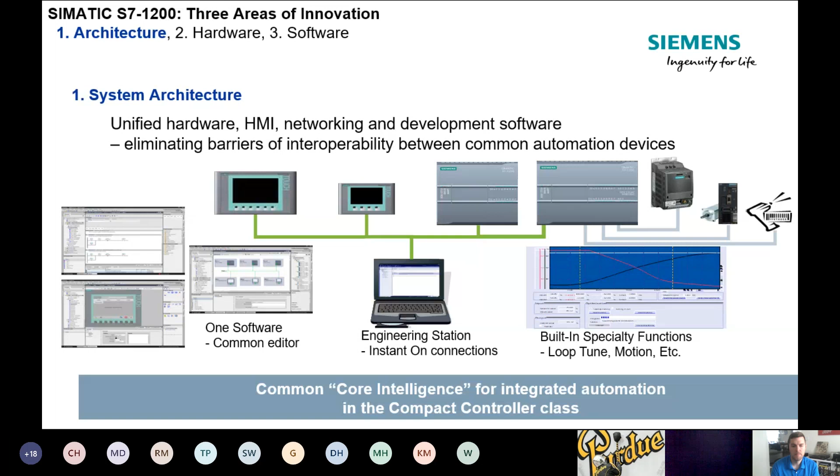This is a little overview of the hardware. So you have the integrated Ethernet on single port on the lower PLCs. Starting with the 1215 and up, there is a dual port, same one NIC, but there's a dual port Profinet card. We have 3 specialty modules to the left. Those are going to be your communication cards. We can go up to 8 signal modules on the right of the PLC.

The 1211, which is our starter PLC, it is non-expandable, but it does have built-in I/O. So these are really low-cost 1211 PLCs. They still have Profinet. They can still be networked, but they don't have any expanding I/O. That does limit the applications, but it does cut down on the cost. You are able to use the inputs and outputs on those and then still network those to a larger PLC.

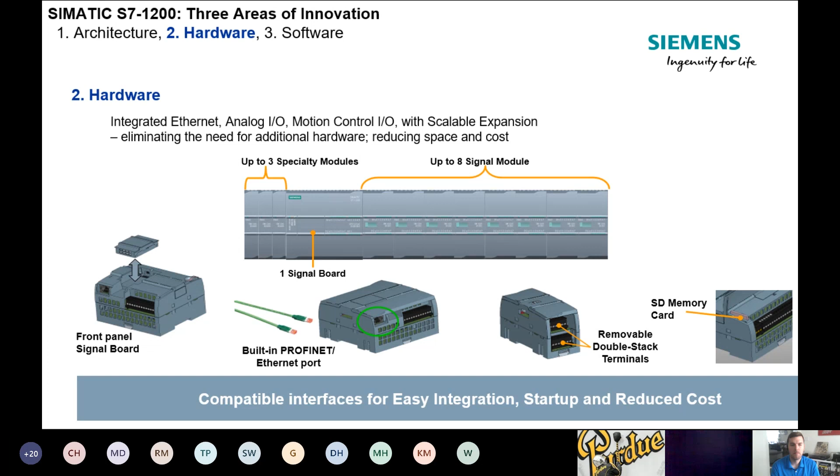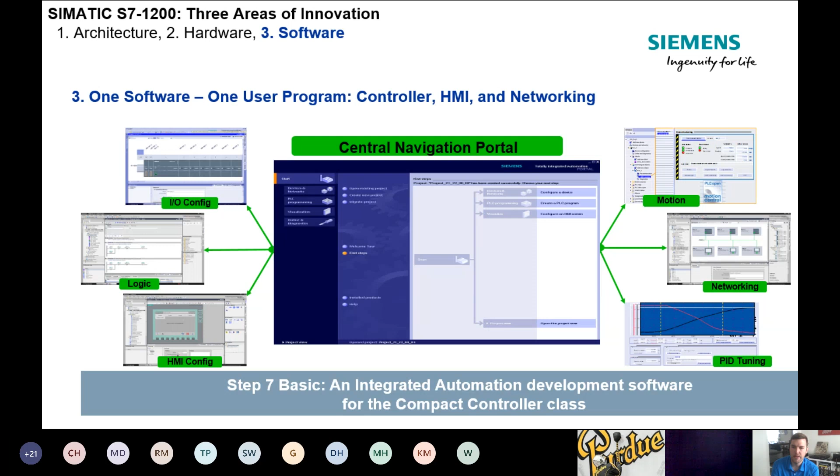Step 7 Basic. Step 7 Basic is our starting software for TIA Portal. This allows you to program the WinCC basic panels as well as the S7 1200. So if you buy a copy of the Step 7 Basic and you have a 1200 and a basic panel, you can program a number of those.

You can still use remote IO. You can still use a Siemens drive, like a G120. Those are still add-on networking devices. They can still be programmed with Step 7 Basic. Basic just limits you to the 1200 PLC and a basic panel, but you can add on licenses for other products.

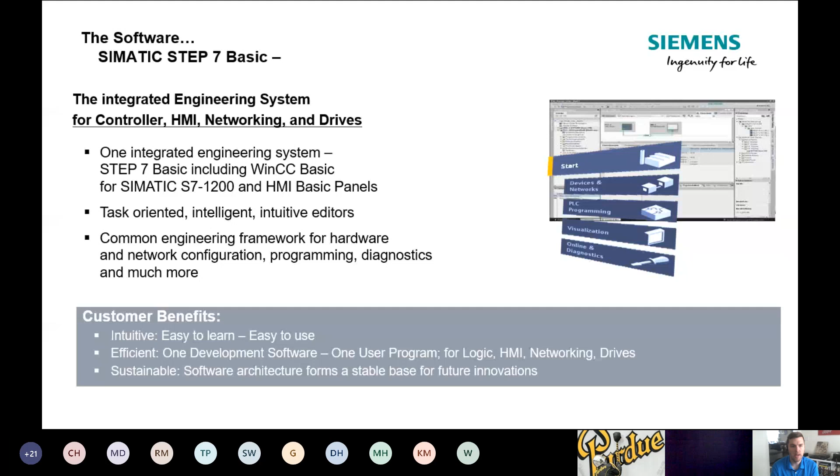So here's a scale of the controller setups that we currently have. We have definitely added a lot more, so this may be slightly out of date, but overall it gives you a basic concept. So the 1200 being a basic controller: standalone systems, wastewater treatment, car wash, elevator pump control, material handling, packaging. You'll probably have seen it in some of your plants or some of the sites that you have visited, but the popular AGVs that are pulling your parts around the plant, there are a few companies that actually will put an S7-1200 in those AGVs that is handling all that automation to drive around the plant to pick up and drop off products.

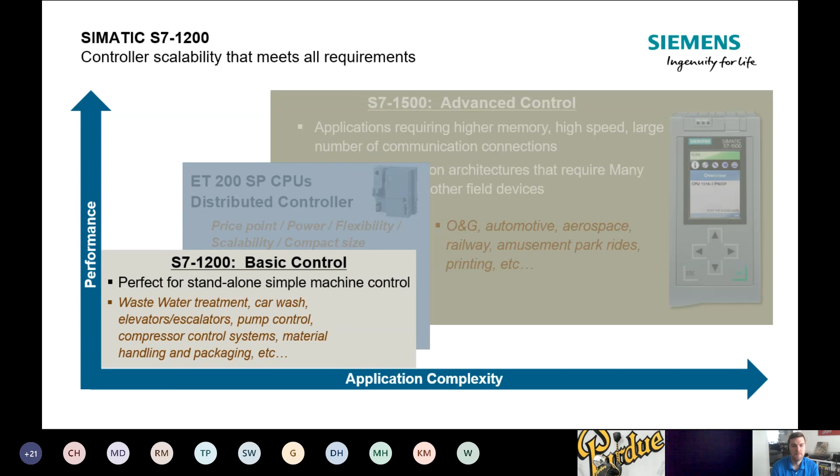All right, some innovations of the 1200. So you have technology integrated. Actually, we are going to show that today in our slides or in the actual example. Security integrated. There's plenty of protections: write protection, security, passwords, safety. All that is built into the 1200. Engineering in the TIA Portal. Integrated system diagnosis.

There is actually system diagnostics that is built into the 1200 that you do not have to program. It actually comes built into the firmware of the PLC, and it will provide diagnostics without having to add additional code. And that's actually built into both the 1200 and the 1500. And then design and handling.

All right. This is just kind of a breakdown of some of the options that we have for the 1200. So you will see on the left side, we have a switch module, the CSM. That's just a four-port unmanaged switch that is in the 1200 kind of body. So if you need to put a switch out in the panel, you can have it in the same form factor as the 1200. We have a power module. So that power module is the power supply for the 1200 for your DC setup. Communication modules. So we have multiple CPs: Profibus, AS-i, your CP1243, which is your second IP card, as well as your RS232/485 cards.

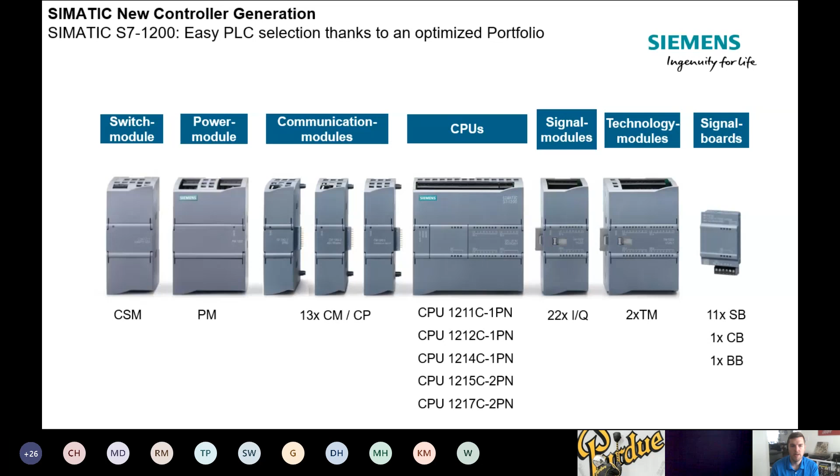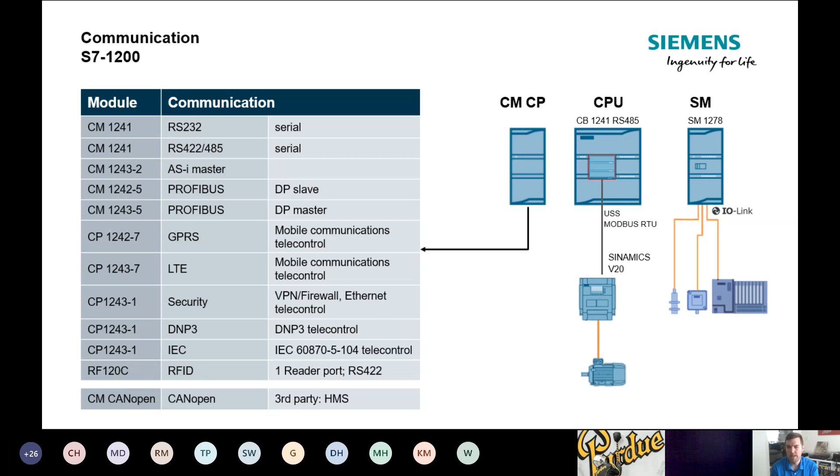So here's a breakdown of the communication modules: 232, 422, 485, AS-i Master, Profibus, multiple setups for our PLC. We do have an RFID communication card. So if you are reading RFID, the RF120C, we can do RFID in there, as well as the IO-Link on the right.

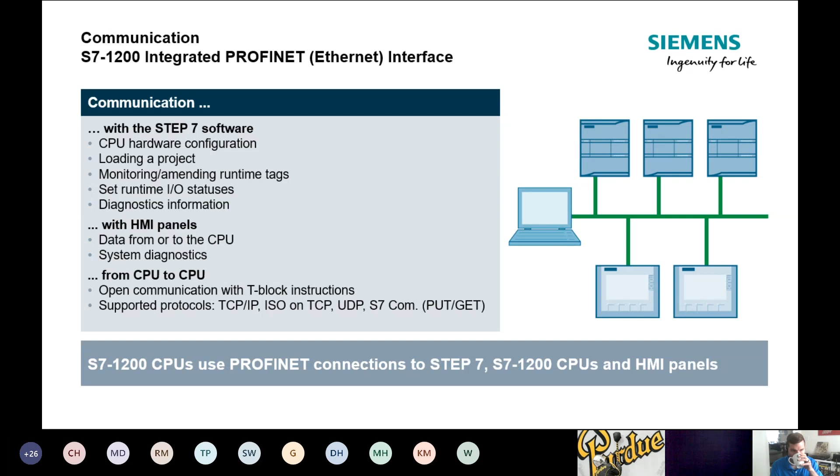Communication, so CPU hardware config, loading a project, monitoring runtime tags. This kind of breaks down the setup for our Profinet. The integrated web server, we'll cover this a little more later, but the PLC actually has an option in the configuration where you can activate a web server, and that will allow you to do online diagnostics, as well as monitoring tags, reading and writing different tags from the web server, all without having the software or an additional laptop. That can just be done on a simple web browser.

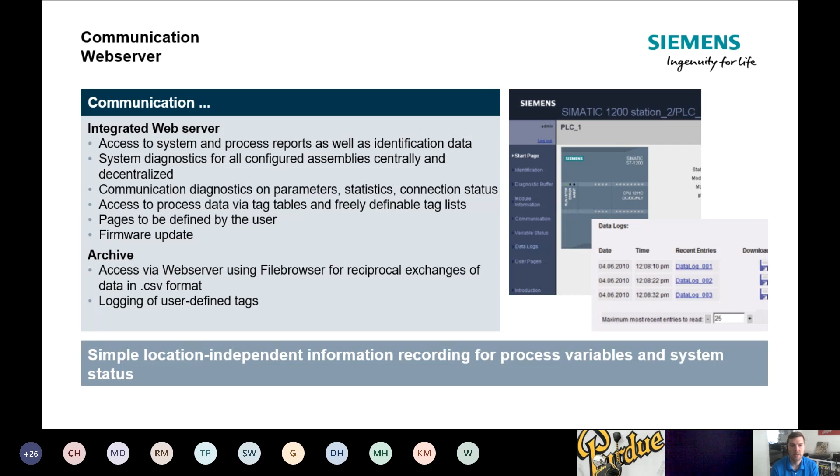And we also have an archive. There are add-on blocks that are free from Siemens that allow you to use a data logger, where you can log data and save it to a CSV file on the SD card of the PLC, and then you are able to actually get in through the web server and download those CSV files for your data logging.

All right, SIMATIC memory card options. What can be saved: program data, system data, recipes, files, projects. You can store a lot. The sizes are on the left side. Typically, a 4 to 12 meg is pretty standard. If you are going to store larger files for your data logging, you may want to go to a larger memory card.

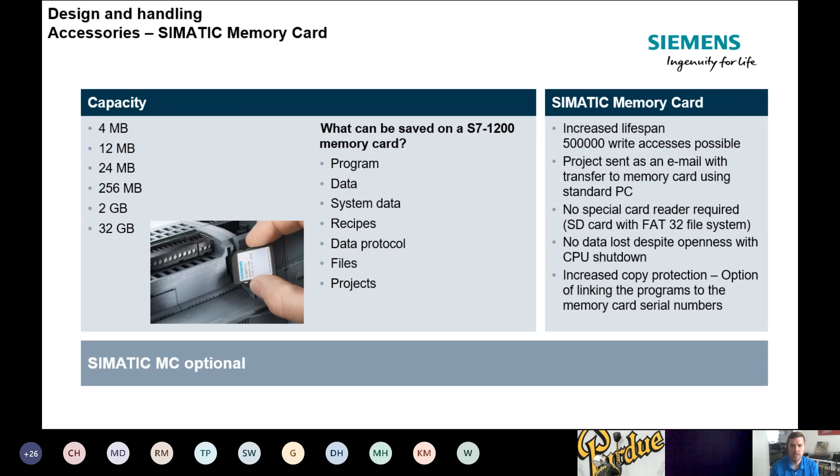And these are not traditional SD cards. These are a SIMATIC memory card. They do have additional firmware that's written on those. They are a higher quality SD card, so 500,000 write accesses possible. And these are covered with a pretty long warranty from Siemens if you do have a card that does fail.

Configuration control or option handling. This is a really neat setup where you can actually, through your OB100 startup, if you are an OEM and you are designing a machine, add in specific I/O cards to the configuration, and then depending on what is getting sent out to the customer, you can configure what is going to be loaded in.

So if a customer does want to add an I/O card, that is something that you can manipulate through the project. That just prevents any type of add-on additional cards being loaded into your machine that may not be set up the way that you want that machine to be configured.

The SIMATIC memory cards, I did get the note. The SIMATIC memory cards are the same for the 1200 and the 1500. Those are both the newer. They will be black in color. The 300 series are the teal colors, and those are not the same. The SIMATIC HMI memory cards are also different, if you're going to put an SD card into an HMI.

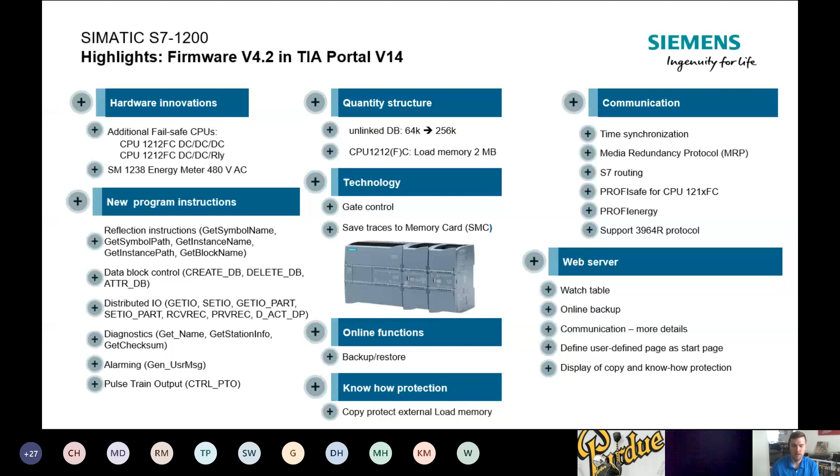So this is showing you some of the features with our web server, and this is showing you for the 1500. But there are capabilities where you can do traces from the 1200, and you can view the traces. I know with the 1500, you do get more flexibility and more configuration options, but this is showing you that you can store traces in the PLC and monitor them on the web server.

Backup and restore. So you can back up a project, recipe data. There's a full walkthrough on that, so if you need it, we can give that to you.

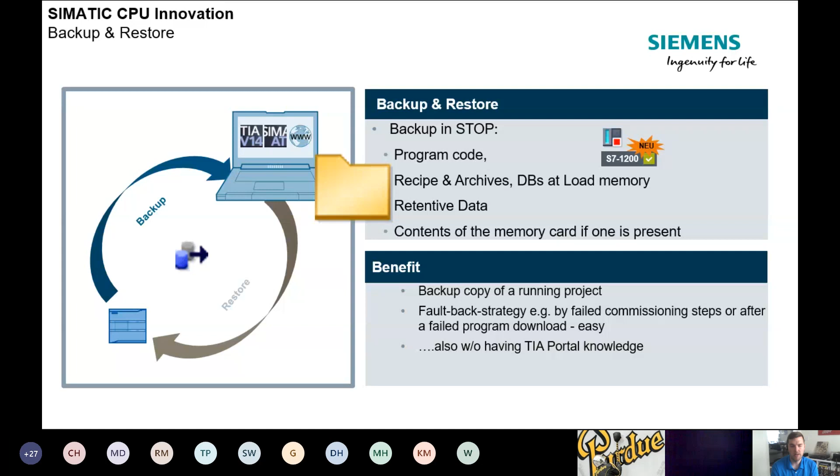Yes. Reduction of functionality of the user-defined web pages. That I am not sure. I will have to research if you're going to have any limitations on the web pages between a 1200 and a 1500. I would say no, because it's a simple web server, but I will have to verify that. That's a good question.

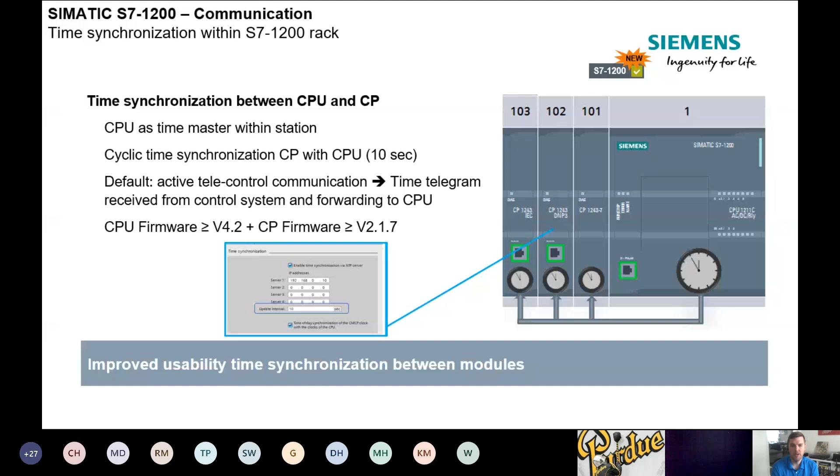Time synchronization between the CPU and the communication cards. So we do have built-in functionality for the NTP servers.

Media redundancy protocol. So this is a ring topology. A lot of us are tasked to manage a machine that has no downtime or limited downtime. You are able to use a 1500 or 1200 as a client on a ring. You've probably seen a lot more rings between switches. This is going to be more of a device level ring, but you do have that functionality for the 1200 to be a client.

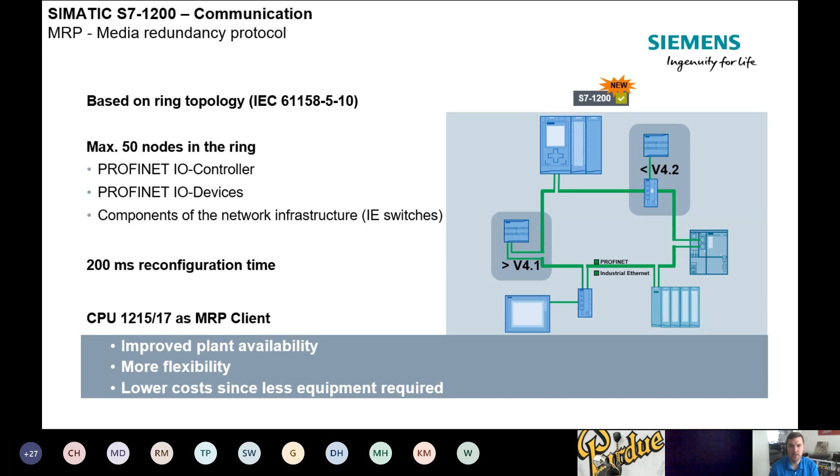You will still need a ring master, so that could be a managed switch, or a 1500 does have the ability to be an MRP master that can do the switching. I would still recommend having a good SCALANCE switch. We do have those available, and those are stocked in Ohio, as well as Siemens does stock all of their SCALANCE switches. And we have done a couple demos on that, but we're more than happy to show you some more to prevent that unnecessary downtime.

S7 routing. So if you've not seen this before, we have a PLC, a drive and an HMI all on a single subnet. And by adding a CP1243 card to the left, we are actually able to add a second IP address that is in the same IP range as an engineering laptop. The engineering laptop needs to make changes to an HMI, so I can tunnel in through the CP card, which allows me to transfer the HMI project, even though I'm not on the same subnet. So you are able to make those changes through that CP card.

And a lot of you have probably done that before. A lot of you are probably doing that now with either 1543s, 1243s, or our typical 343 card for our 300s. You'll add those to your rack, and that's where IT usually pulls their data for data analysis or different monitoring systems. But you are able to actually push back down and make changes on a system as well.

So some protection. I know we talked about security, so you can disable copying from the internal load memory to an external SD card. The 1200s have an internal memory, so you are not required to have an SD card. You can add an SD card and let the project run from the SD card, but there is an internal memory for the 1200. The 1500s and the 300s do need the SD cards to run. Those memory cards have to be in there. That's where the project is stored and run from. But the 1200 does have internal memory that you can just download right to, so that keeps you from having to add a memory card. But you have protections on there, so nobody can try to pull that project off.

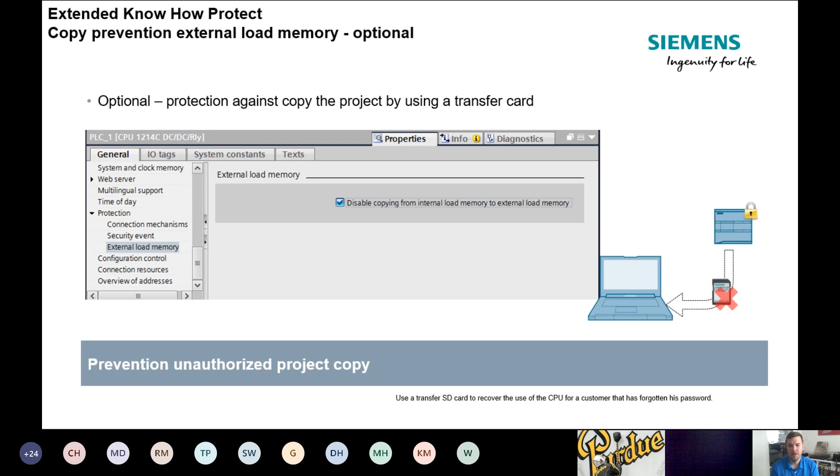You also have the ability to set up a SIMATIC memory card as what we call a transfer card. If you need to load a new project into a PLC and you're not physically there, you can put your project on a SIMATIC memory card that is set up as a transfer card. Your customer can power down their system, put the card in the PLC, turn it on, let it load, turn it off, and the project will automatically copy from the SD card and load into the internal memory of the PLC. That way your customer doesn't really have to do any changes. It's a simple maintenance task to transfer a new project into a PLC. It keeps the project safe from any unfortunate changes in the code.

The SIMATIC Automation Tool. This is a really cool tool that we have here that allows you to program updates. I can do firmware updates. I can set IP addresses. I can scan the network. This was free. I think Siemens has now started to charge for this, but you're looking at maybe $200. Very, very low cost for what this will allow you to do.

You can download to PLCs. You cannot do any programming, but if you have a PLC that is running and connected, you can take your project and download to the PLC. It will take the download and it will run, and it's all done from this add-on software. You don't actually have to have a full-blown copy of TIA Portal. You could sell this to your customer and let them have it on an engineering laptop. All you would have to do is send them a copy of a project. They would open it, select the PLC that they want to download to, and push that down.

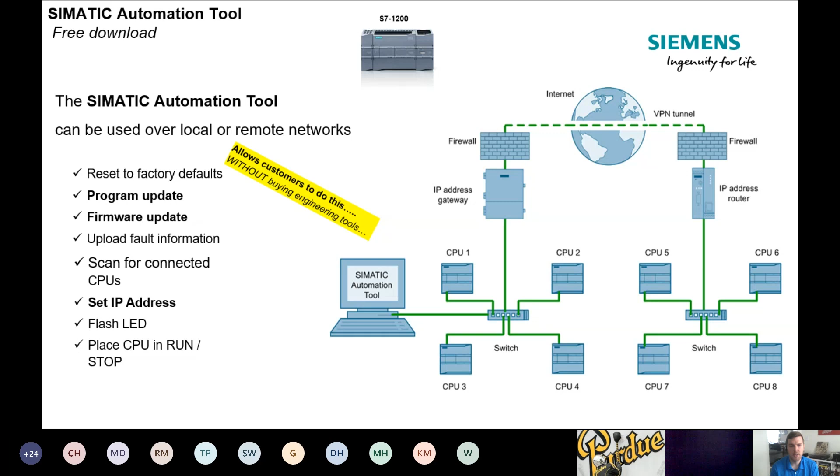I did get a question about internal memory for the CPU. I will have to double check that. It is listed in the S7-1200 manual. I do not know off the top of my head what the internal memory limits are for the 1200. They may vary by PLC, but I'll dig that up in the manual for you.

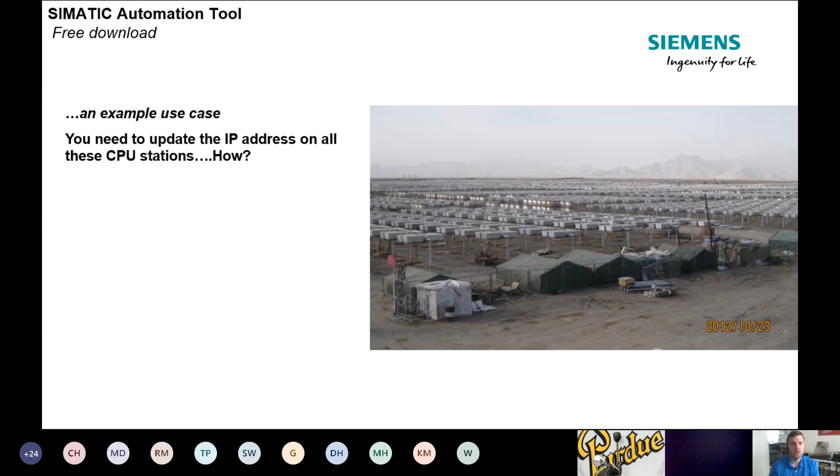All right, so you had to go around and change the IP address on all of these CPU stations.

Obviously, nobody wants to go through that and do it one at a time, or make the user go out there with a project. You can use the automation tool to update them all at once. I don't know why you'd want to do that, but in case you do, we have that capability.

Like I said, they do offer a free version. It is limited. There's a paid version. Like I said, I'm going to say about $200, and that does have the full functionality that you can use to modify and configure PLCs without actually having to program.

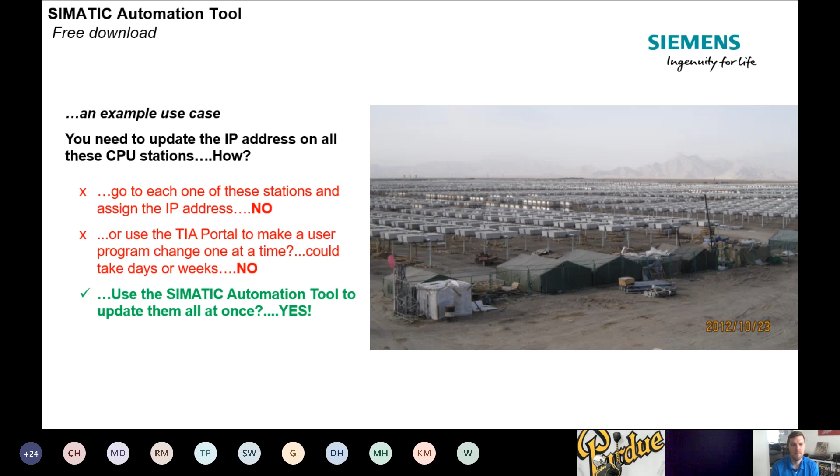All right. So general mechanical engineering, special machines, apparatus engineering, packaging, production, AGVs, drilling, cutting, grinding. It's kind of just an overview of the basic 1200 controller. This will definitely give you a good idea of where this is going to go.

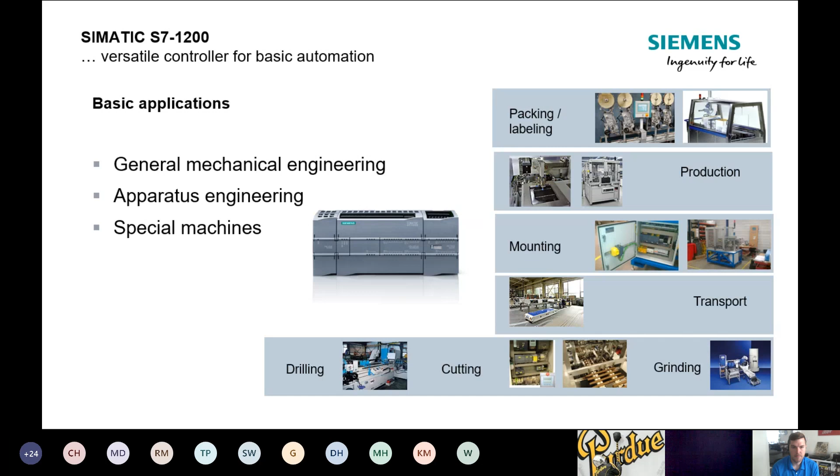All right, starter kits. So these part numbers are definitely going to be an older version, but please get with your salesman and ask them for the newest list, or if you have a specific one that you're looking for. These starter kits are great. Now they are for starter kit testing only. These are not to buy and put into your machines. They are monitored for how many we're selling, but these are really, really low cost starter kits.

The top one's just the 1200 with Step 7 Basic. You also get an install disk and a license. You also have a printed circuit board with some toggle switches so you can test some code. From there, we also offer it with a 400 and a 700 basic panel. Once again, Step 7 Basic will program both the PLC and the basic panel.

So you can get a 4-inch or a 7-inch HMI. I'm going to say these are $900 for the largest one, down to about $500. These are really, really inexpensive. I think the license for Portal itself is roughly $500. So you're getting a license and then getting PLCs and HMIs for practically free. This is our standard setup.

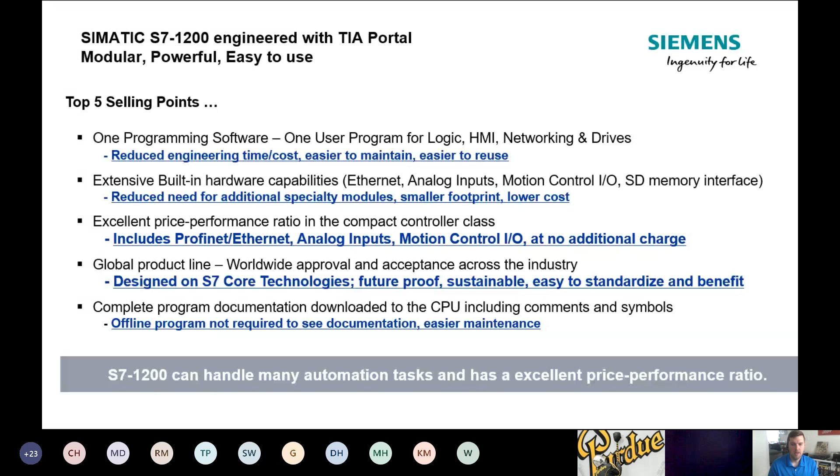Top 5 selling points: programming software, built-in hardware capabilities, price performance, global product. Pretty much a walkthrough of why the S7 1200 can really do a lot of stuff, and we're going to get into that with some of the actual programming. And that is the presentation.

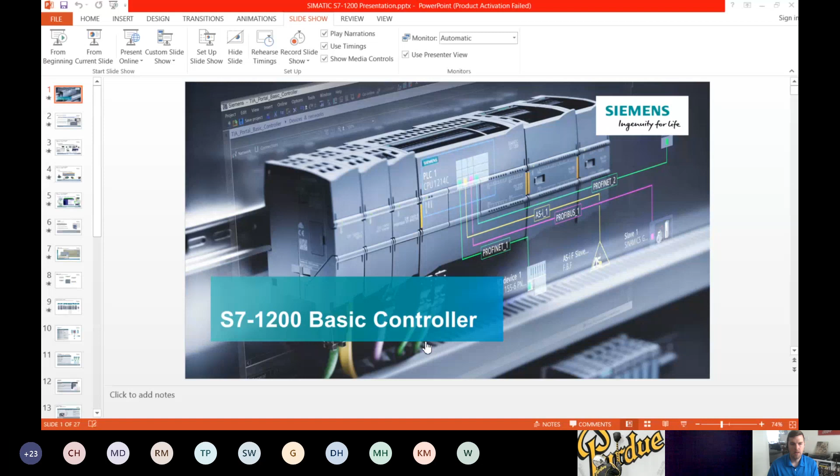All right. So I've answered most of these questions here. All right. So you are all muted. That is my presentation for the PowerPoint. I'm going to jump into TIA Portal, but I'm going to take a minute here and give you guys an option if you have other questions to chime in and ask away. Give it a minute or so, and then we can move on. So if you want to ask a question, unmute and ask away.

Yeah, this is Mark Dobrinsky from Novelis, Terre Haute, Indiana. Hey, Mark. How you doing?

Hey, what I'm interested in is the unit that you just showed earlier; it would be good for training. And I'm interested in the one with the safety, because then we can set it up and use it for whatever we want for training. Yes, so we will get you a quote on the 1200F starter kits. Yes. Thank you. No problem.

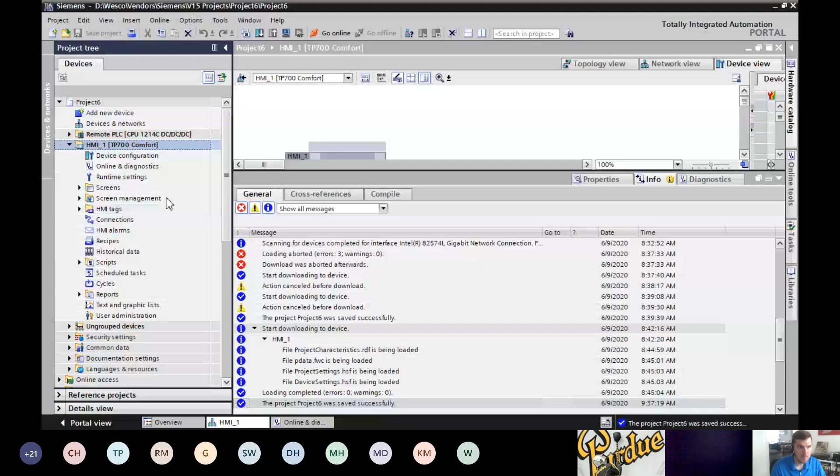All right, so I am going to start a new project real quick. As I'm presenting TIA Portal, if you have other questions, like I said, please chime in and we will answer those for you. All right, so if you have started TIA Portal, you've probably seen something like this. This is a typical setup that you'll have here. And once you've gone through that setup, you will go into our project view. So we're going to go ahead and start a project.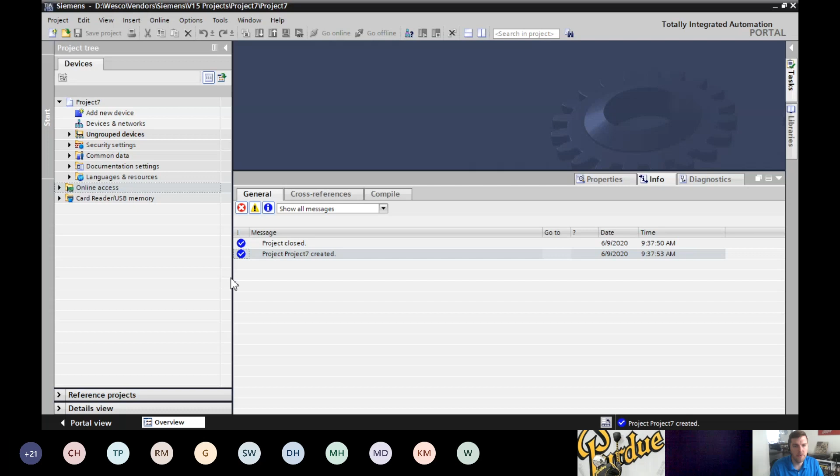So I'm going to add a device. And I'm looking for a 1200. And I'm going to show a feature here. So down at the bottom of your CPU setup, there's one called unspecified. So by selecting this, you'll see I kind of have like a ghost PLC.

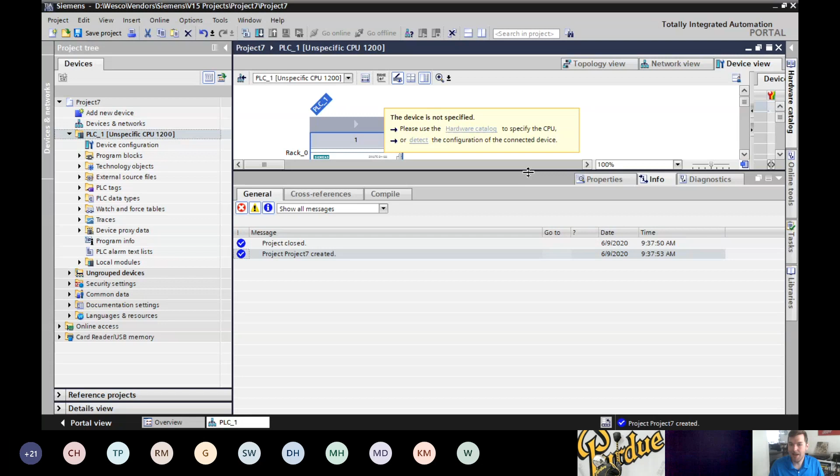What this allows you to do is if you are connecting to a machine and say your machine has a lot of I/O. Now in a 1200, we do have a limited I/O that can be expanded. But if this is a 1500 and you had a really long rack that you needed to pull in some hardware, you can configure everything from the catalog and pick module by module. Or I can actually do a detect.

What that's going to do is it's going to check my network to try to find the PLC that is currently out there. It found my PLC, and by being able to do a detection, I not only bring in my PLC and its configurations, but I automatically will bring in the I/O that is on the right side of it or that is connected to it. So if I had some communication cards, those would automatically get pulled in. If I have I/O on the PLC, that gets pulled in.

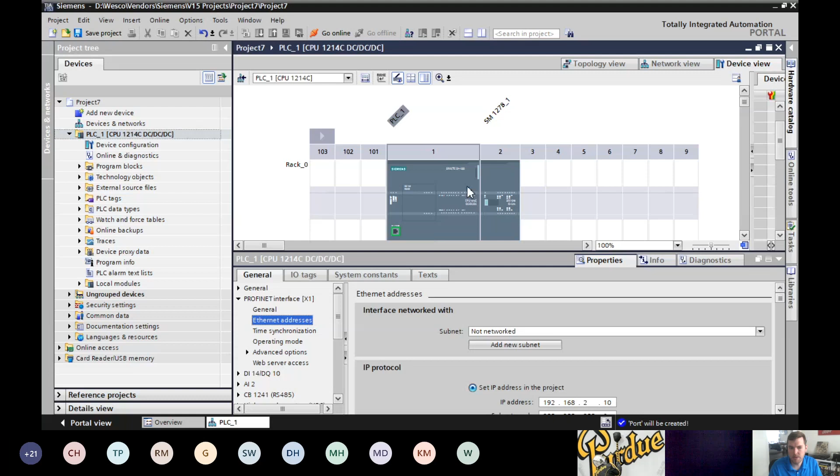In this case, I have a CB 1241 on here. This is pulled in, but that automatically will detect it. It will know the configuration that I have set up. Now this will automatically default it back to the IP address of the PLC that I have. But your configurations will still need to be set up. This isn't going to pull in all the configurations. It's just going to pull in what it sees, being this is a new project.

All right. So some of the nice features of TIA Portal in 1200, like we were saying, we have our cards to the right. So here's our hardware catalog. So those of you that are familiar with the SIMATIC Manager or S7-300, your hardware configuration was always in a separate page. You always had to open that up and kind of run through. All this is going to be done in the same window with TIA Portal. There is no second pop-up or another screen that you have to go to. It is done more with tabs, but it's all kind of built into the one window architecture.

So on the far side, I have all of my communication modules. So I have my 1243 cards, depending on what type I need. Profibus, point-to-point, identification, all that is going to be built on the right side. In this case, I'm actually using a communication board, which is just a simple RS485 single configuration here. Instead of having the card on the right side or on the left side, I have it just built into the PLC with the communication board here.

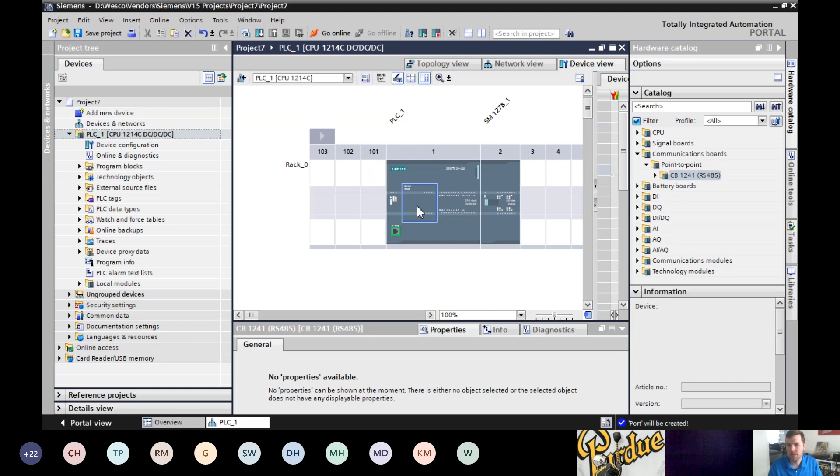On the right, I have an SM1278. This is actually our IO-Link module. So this is my IO-Link master. I actually have up to 4 channels for this IO-Link master that I can configure. So if you would right click and wanted to configure, you can start the device tool, and that will open up your port configuration tool where you can add on additional IO-Link modules. In this case, this is just using a distance sensor running on IO-Link.

If you have not seen it, Dave Henderson does an event that has done some with IO-Link for some of our controls products that are running on IO-Link, which is a really, really neat system that we have. We also have multiple IO-Link devices out there.

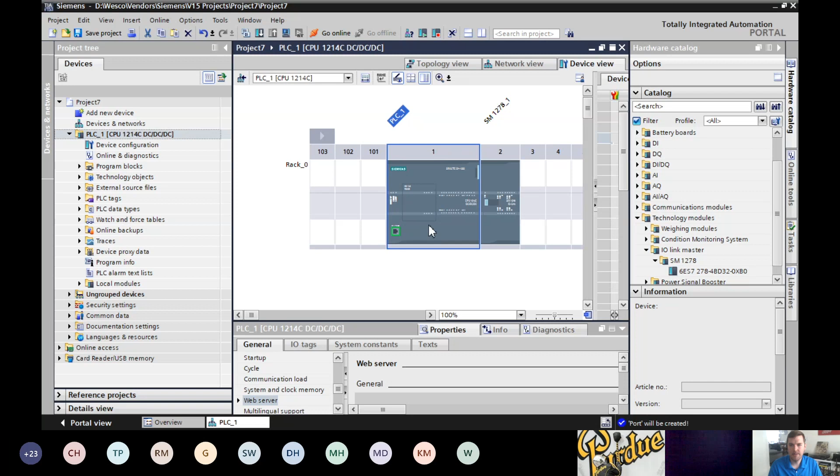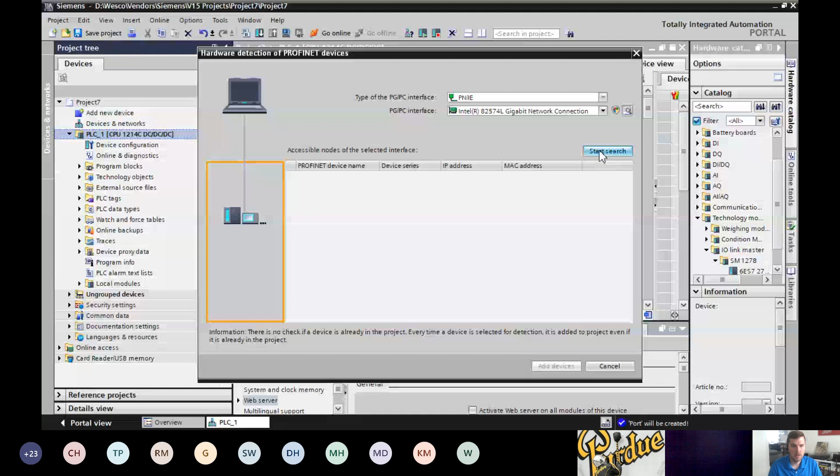All right, from here, I now have a PLC. If I wanted to add additional devices that are out there, this is just a single rack. If I wanted to pull in maybe an IO rack that is out there, I have the option to do hardware detection. And that's actually going to search my Profinet network. By clicking here, I can hit start search. I can find my remote IO rack.

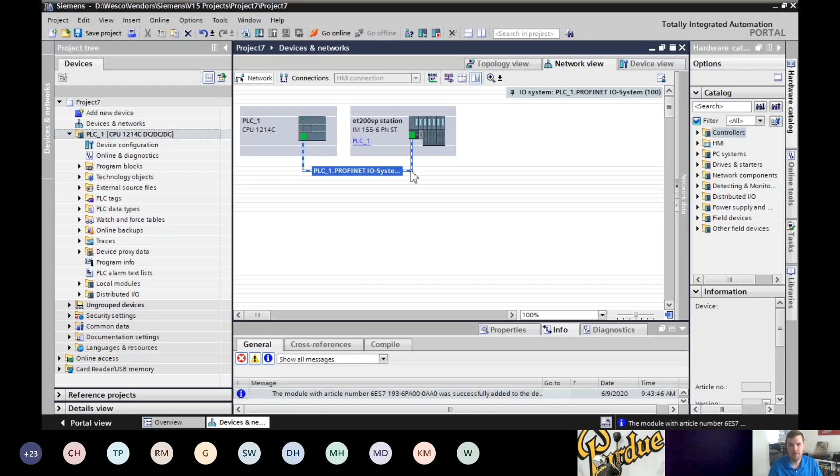And if I go into my network settings, you can now see I've pulled in that IO rack. I can select the PLC here, or I can use the drag and drop. And I've now made my Profinet connection. And this is my new Profinet network. By going into the device view, you will see it not only brought in the head module, but all of the corresponding IO cards, as well as the correct firmware.

This IO card may have multiple firmwares, and if you are adding this manually and you start going through by full part number, you may have a 1.0 or a 1.1, and you would need to actually select that in your hardware catalog as you go through. If you're picking the right one, you'll need to make sure that the IO version is what matches the card that you have. So with the hardware detection, I'm actually able to pull that in and add in that device.

Same thing from the PLC. If I wanted to, I can also try to do a detection for an HMI. I can do maintenance on here. All that can be pulled in from that additional setup.

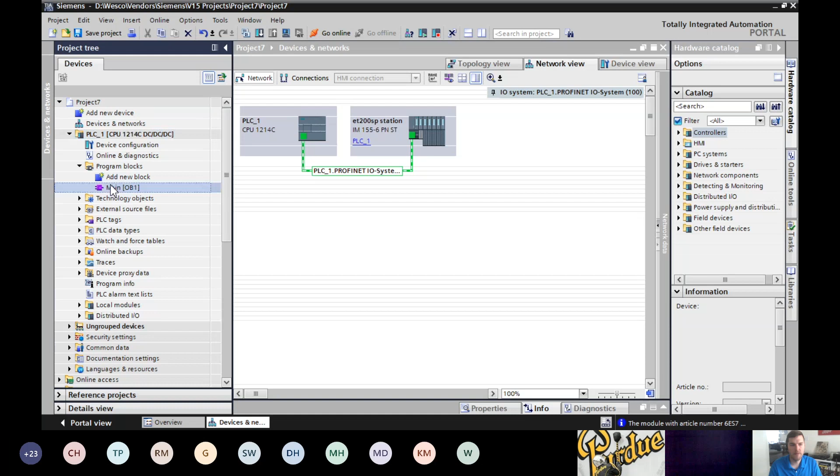I'll try to keep this brief because I want to get into some better setups for our project, but one of our neat features for the TIA Portal is if I wanted to drag and drop some code, I'm able to do this here. Call this a start, call this a stop, call this a run. I can add in additional blocks. If I pull this here.

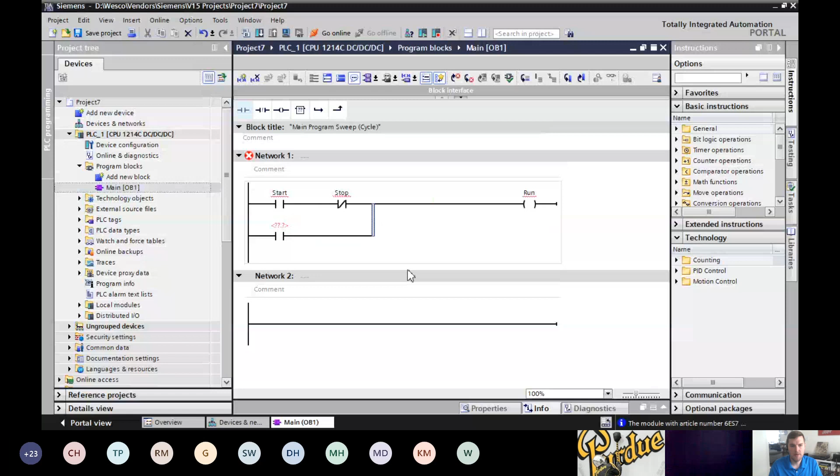Now the neat feature with the TIA Portal is, obviously I don't want this on this side of the block. I can actually just grab this and redirect it and move this around. A lot of times you have to delete and kind of start over, but I'm able to drag and drop any of these icons wherever I need them, and it will automatically reformat.

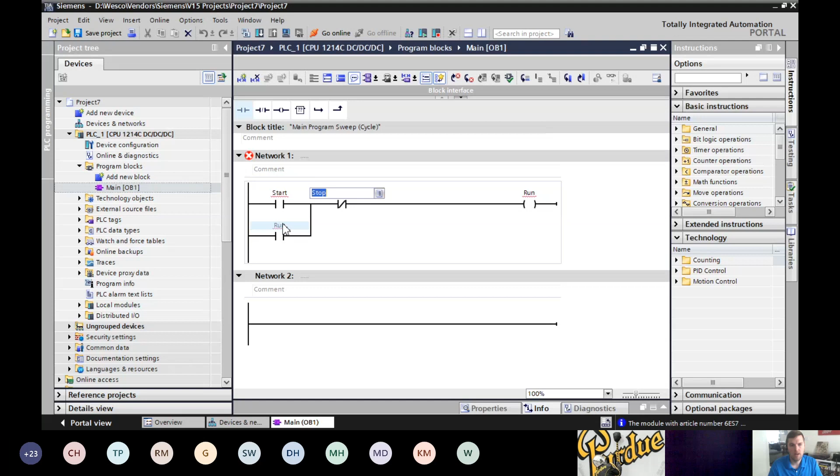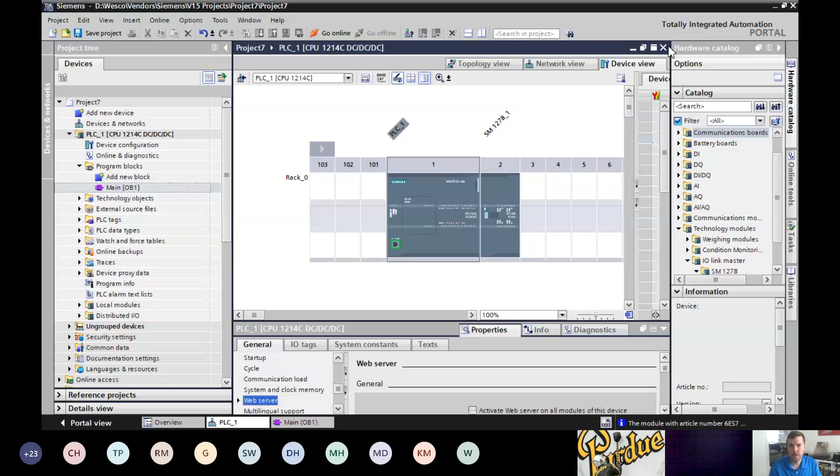All right. So I have some undeclared inputs that I can now either right click and define my tag. I'm going to look at another option. I go into my PLC. Say you add an IO card to a project and you want to know that you've used all the IO that you have. I have the opportunity to float this PLC. And if I zoom in on my PLC,

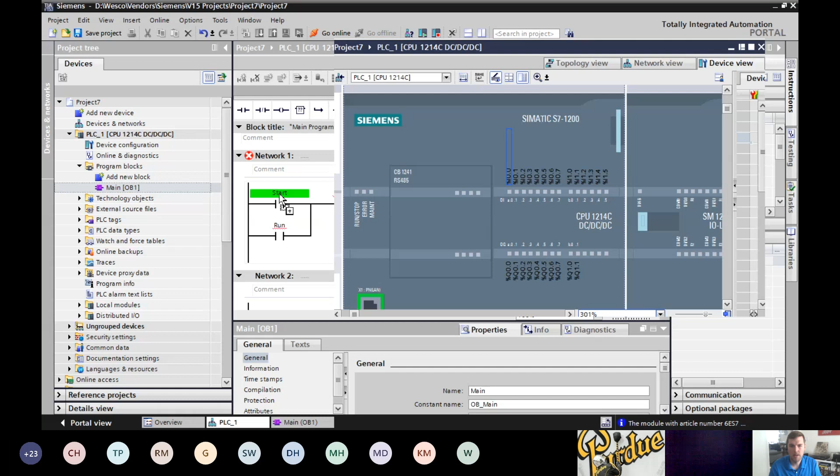you should be able to see I have the inputs and outputs right here on the CPU. If I drag and drop these, I can actually start adding that there. I can actually assign run by going the opposite way. So instead of just adding the device, if I go back to my start, I drop this on here. Already done that one.

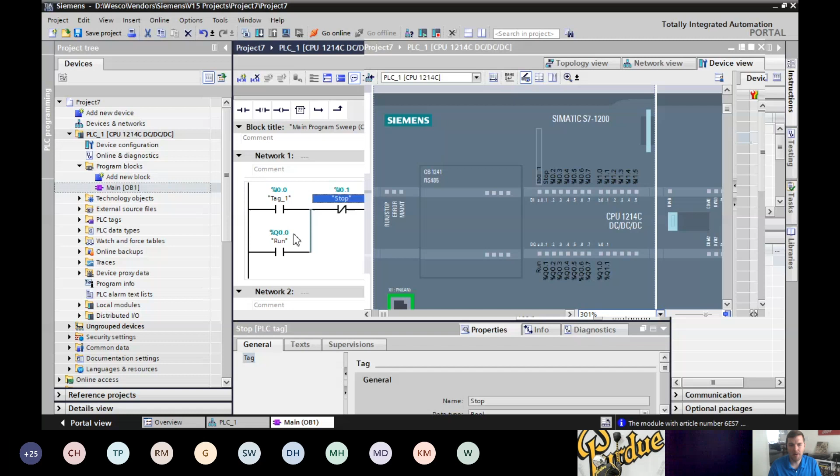I can actually label the input. So not only did I make that connection between an undefined tag, I've actually gone ahead and added in the input that it's under. So I have my I's, I have my Q's, but I now have tags. If I want to, I can rename this. I start. And I now have my IO directly on the card. Kind of a neat feature that we offer here with software.

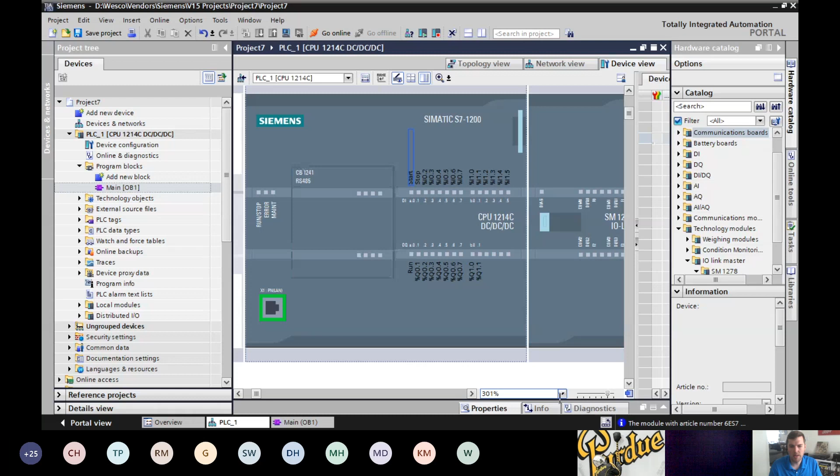You can also see the IO in your properties. I go to IO tags. You'll also be able to see the IO listed for each module. And I can actually create my tag table here. Input 3. Now this will automatically create my PLC tag, and we can put it into the tag table. If I want to, I can actually add in a tag table on each card. So as I add a new tag table, I can reorganize my tags in the PLC.

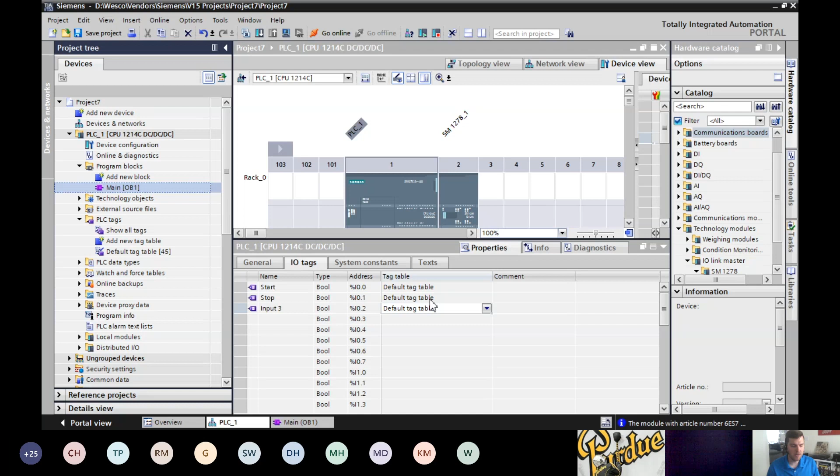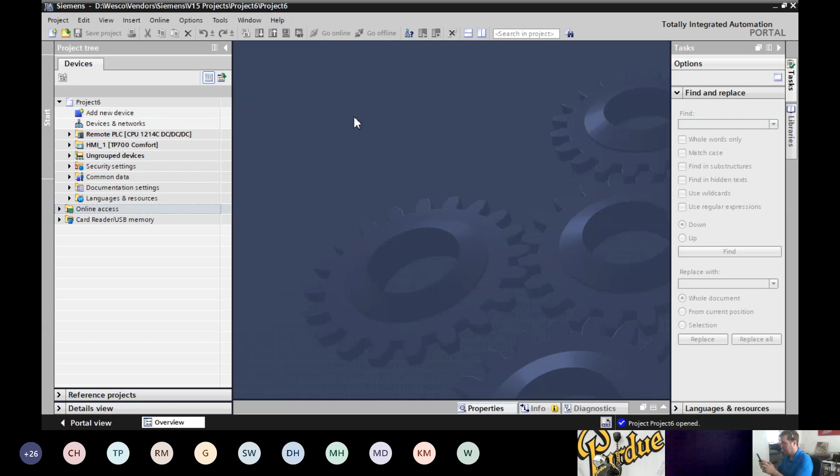All right. So I'm going to actually open a different project and run through some features. So I'm going to give you a view of my setup here. All right, so you should be seeing this is a simple setup of my home rack.

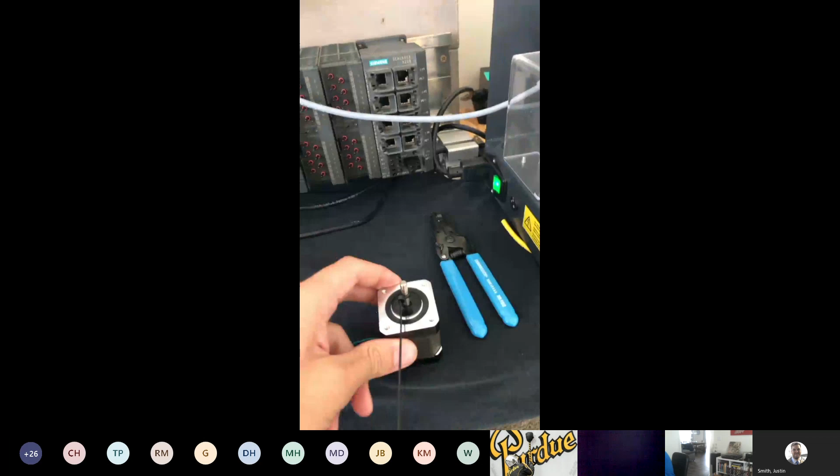My apologies on the rat's nest of cabling. But here's my 1200. This is my CB card that I have my communications going to my V20 drive, which is on USS protocol. I have my toggle switches. I have a stepper motor right here. And then I have my 7-inch Comfort Panel HMI. This is where we're going to run through some of the projects that we have been working on here. And I'll come back to this in a moment.

All right. So in my project here, I'll walk through some of the setups that we were reviewing. So one of the options that we have is called our technology objects. If you've never seen the technology objects of the 1200, the technology objects are built into TIA Portal for different tasks. In this case, we have a 1200, so I can do a positioning axis. I can also use it as a command table. I can do PID loops, so temperature, PID Compact, 3-step.

This is all built into the software. This is not an add-on. There's no additional cost for this. This is just built into TIA Portal, and I can run my PID loops as well as my identification. So if you have an RFID reader, you are going to add in this technology object, and this will allow you to address each reader as its own technology object, and then each one comes with its own configuration. This is really, really neat.

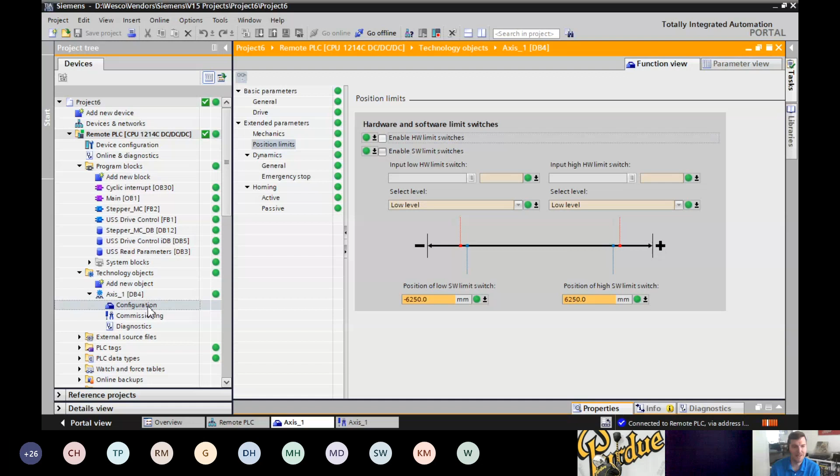All right. So I will try to recap this real quick. Configuring of the drive. I'm not sure if you guys had seen that for technology. So in our technology objects, we can do positioning. I can do PID setups, as well as if you have RFID, you can actually add in each configuration block for each reader that you add. But this is a technology object that is built into the TIA Portal. There's no additional cost for that.

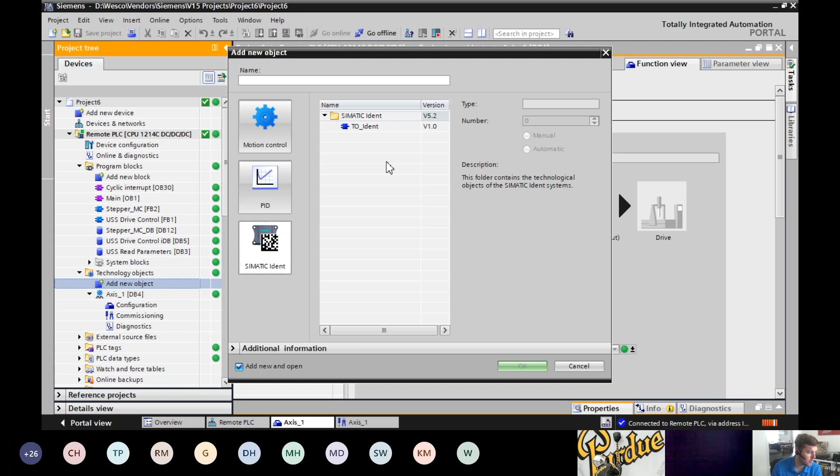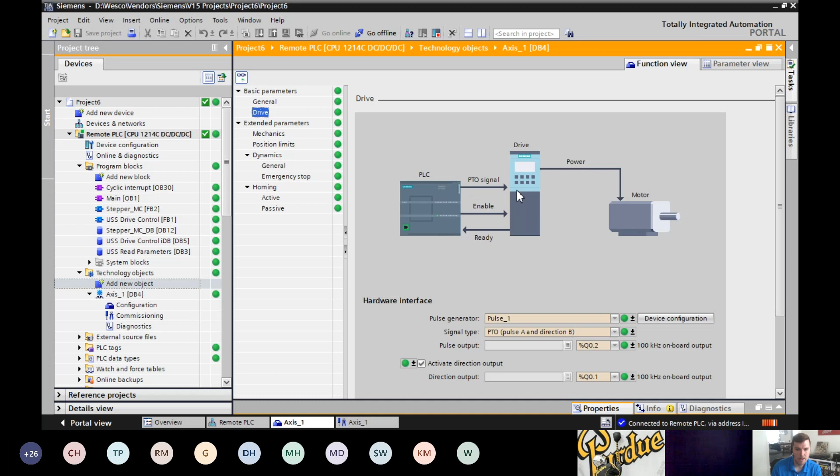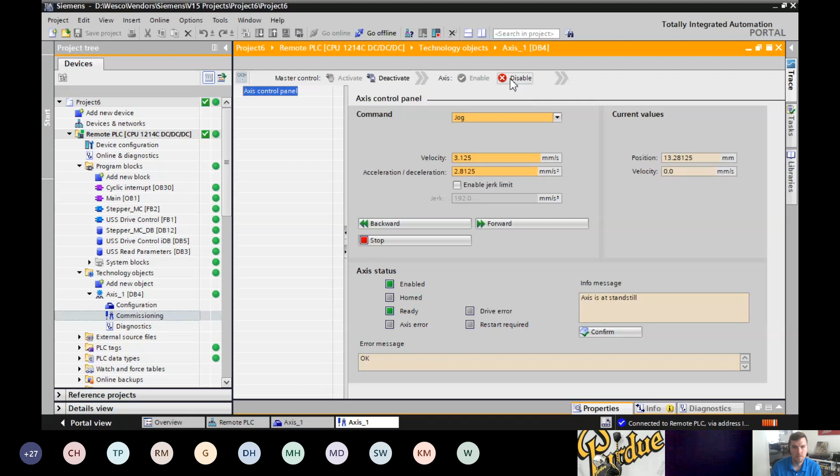In our case, I'm setting up a technology object for positioning using a stepper motor. I'm using pulse train outputs here. I have my drive set up, and then I'm able to run that drive here. By enabling this, I can now spin my axis. This is just all built into the technology object for testing. All right. That's our technology objects. I'll kind of get into more on that in just a second.

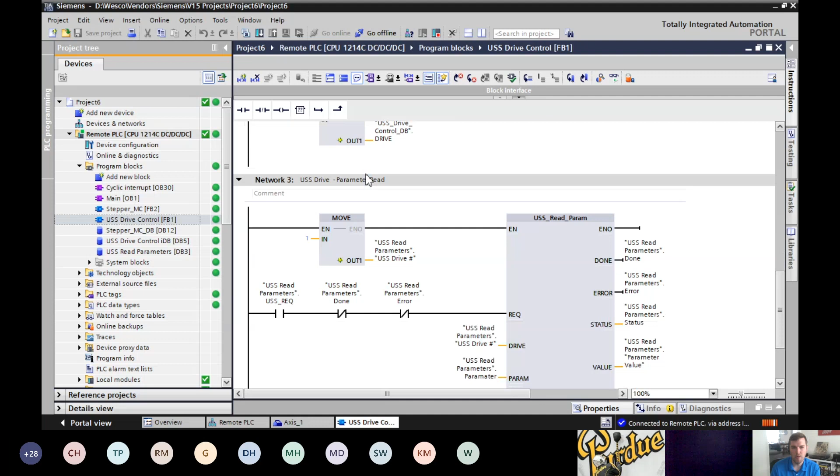Another feature that we have is going to be our drive control. So if you have a G120 or a S120, those are Profinet enabled drives. But if you have a V20, which is our basic value drive, this is a pretty simple, we refer to it as a shaft turner, low cost drive. It does not have a Profinet card, so it is not something that you can network. But if you have either Modbus or USS protocol, this will communicate over an RS485 setup. I will kind of go through that here in just a second.

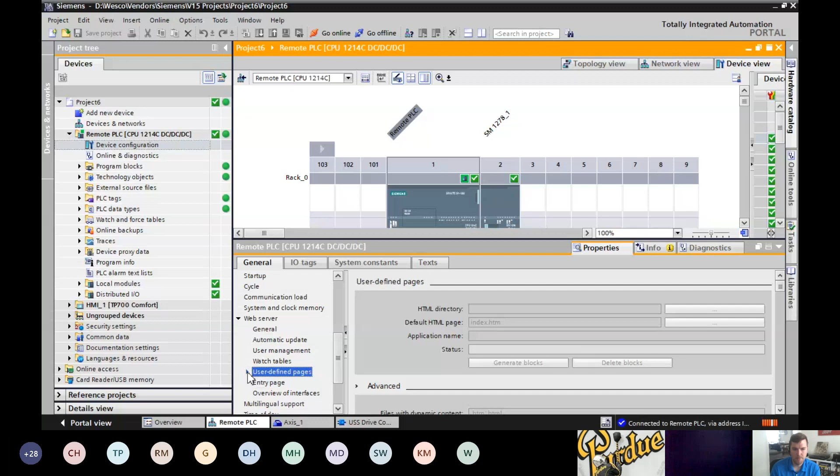And one other option we're going to look at is the web server. We kind of talked about that earlier. So if I come to our web server of the PLC, I can actually activate my web server. I can enable who can see what, watch table, user defined pages, so you can actually make your own HTML page and write code for that. Multiple setups for our web server. All right. So we are going to set up real quick.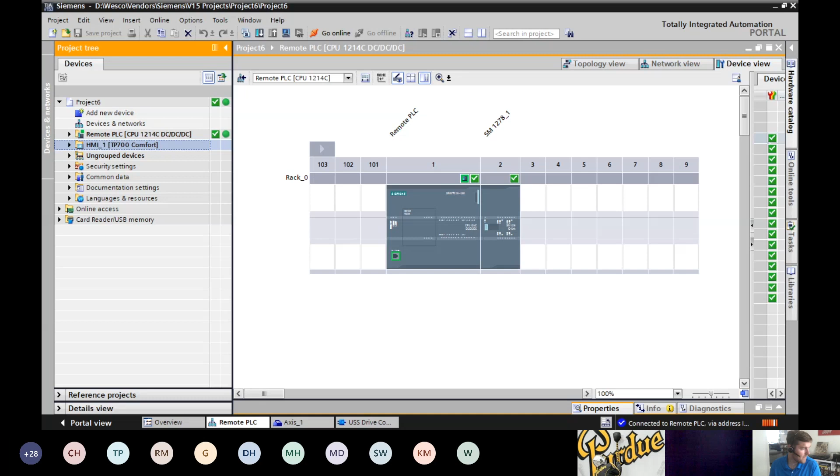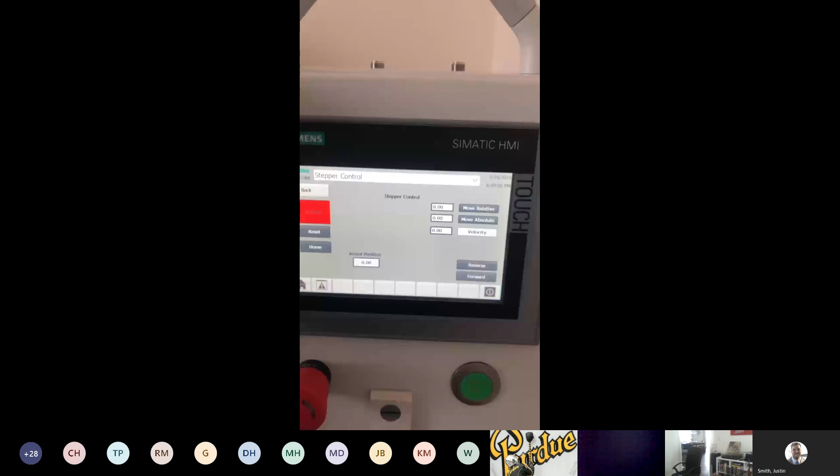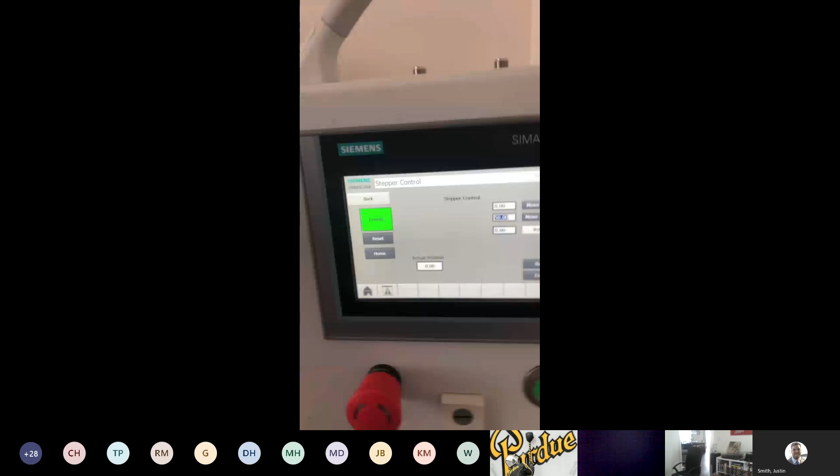Jump over here. All right, I'll try to make this not super jerky. Over here on my HMI, this is my SIMATIC HMI. I have my stepper control. From this setup, I'm able to home the drive. I can enable the drive. And then if I want to, I can put in a move by. I can activate my drive here.

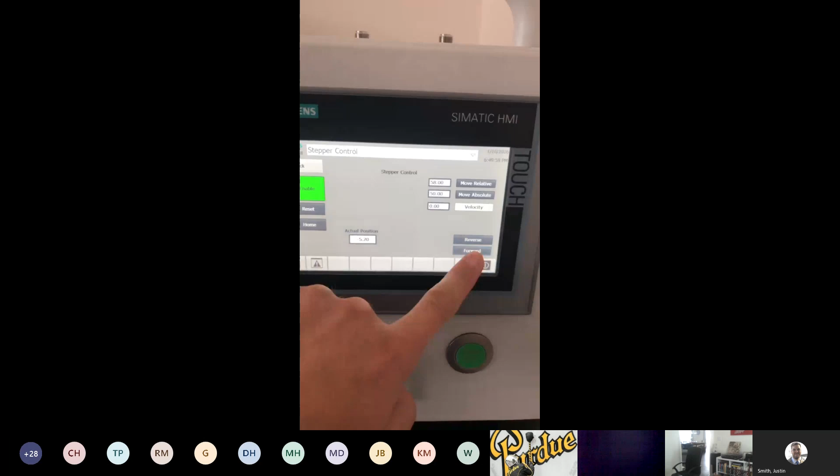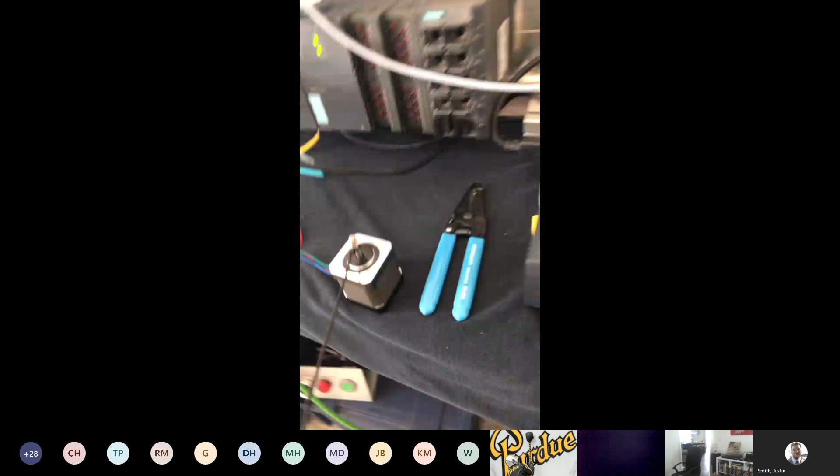All right, so I have this set up on just a simple servo, and I can set up my positioning. I can do relative moves. All that's just built into this little $20 servo that I bought. And this is all built in. So you do have a very simple motion control built into the servo here. Let's switch back to my portal real quick.

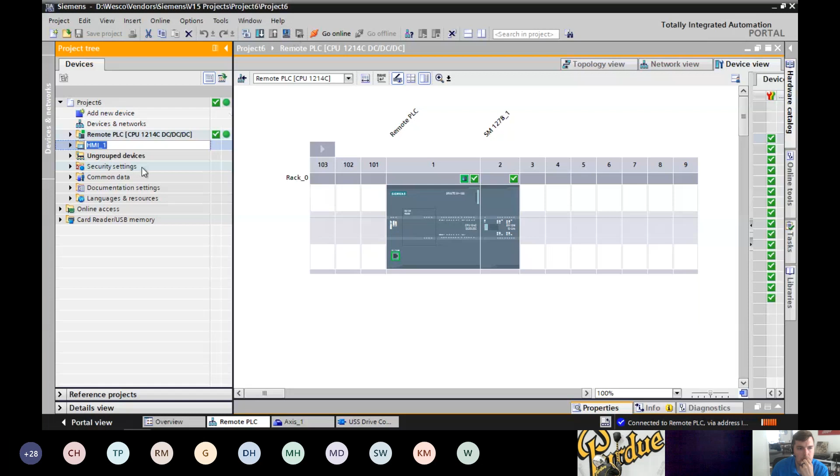All right, so on my HMI, let's try to do a test here. So we had mentioned the web server, and if I wanted to, I can punch in the IP address of the PLC, and I can pull that up on a simple browser, and that is helpful if you have a laptop and you want to be able to make changes or do different runnings on there. Another really neat feature that we have.

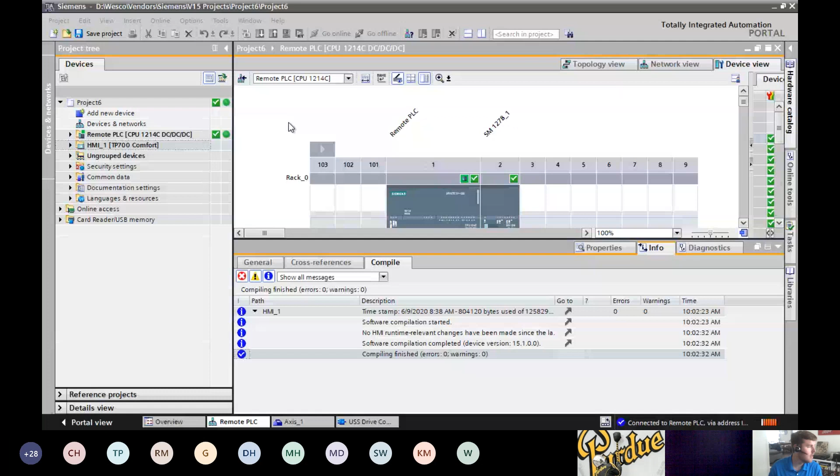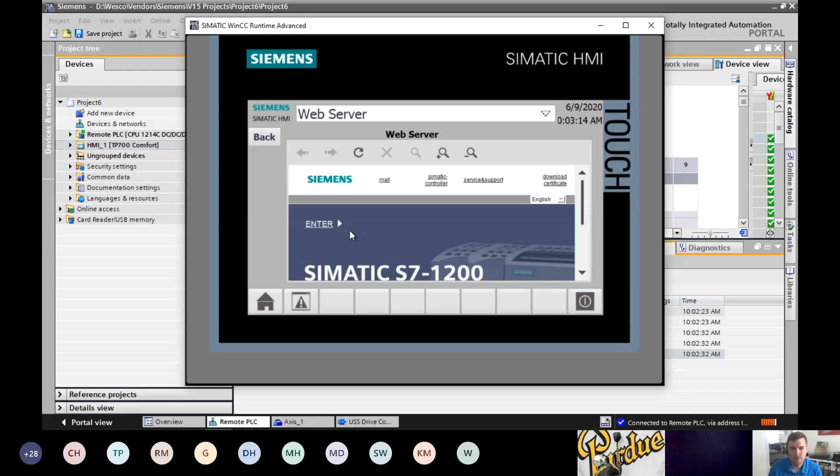This is just a runtime advanced of the HMI that we're currently running, but I have the actual option to embed the web server into an HMI. So if you have an HMI that is out there, there is a web browser icon. So I'm actually able to log into my PLC from the HMI and do some diagnostics. So if I want to enter the 1200, you put this information in. This is something you can set up for a maintenance person. There are different levels that you can use to log into your PLC.

And some of the features that you have with this web server: you can get status on your PLC that is built in. So I know the project that it's running, I know what version of TIA Portal it was programmed in, station name, what type of PLC it is. This is a DC. I can see that it's in run. I can put it into a stop mode, I can run it, flash the LEDs.

I have built-in setups on the far side for the diagnostic buffer. A lot of us out there, if you have maintenance where something starts to flash and you need to know what it is, a lot of times we have to call an engineer to get a laptop to go plug in, to open the project, to go online, to view the diagnostic buffer that says an IO card is unplugged. Sometimes that can be a lot of work.

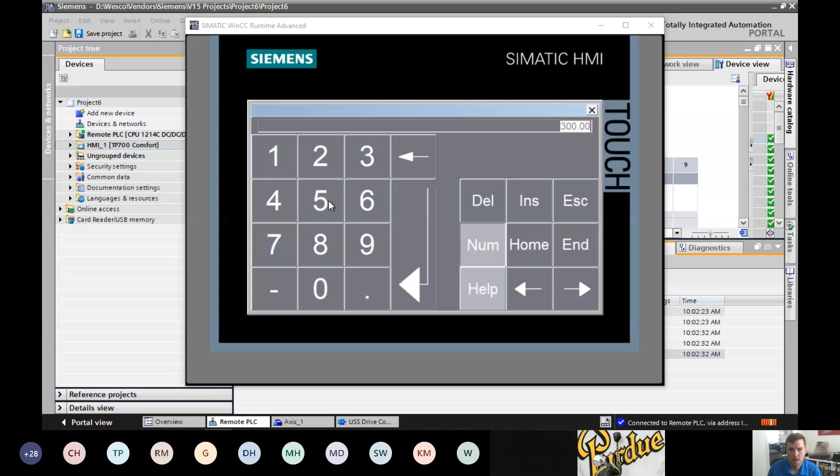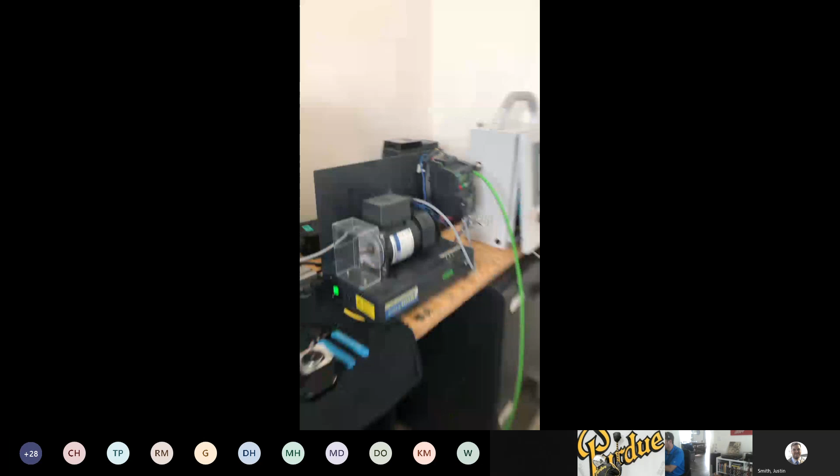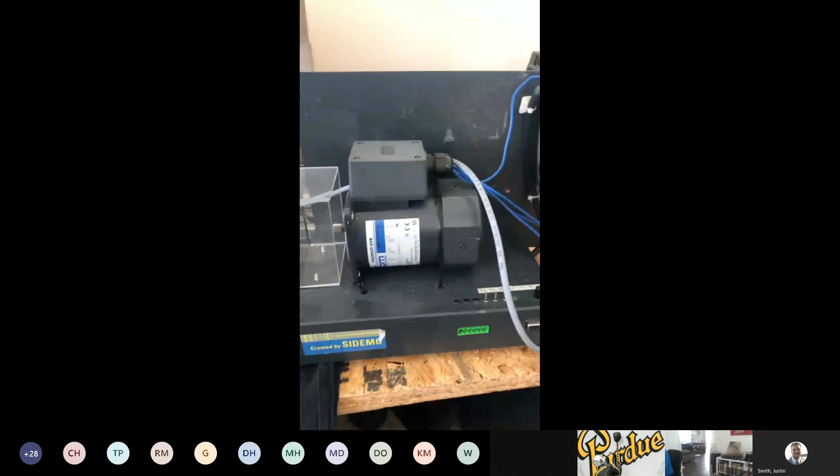By setting this up here, you can do the same thing. So here's my V20. It's running. And I'm running the same thing on the HMI. This is all being done through that CP card. You can also use the card next to it, the CM 1241. This is the card that I have, and it will run on this.

Once again, you can actually daisy chain, I believe, up to, I want to say 40. Maybe it's 20. You can do up to 20 drives on USS, and you can actually daisy chain your VFDs to run on USS. So V20s, like I said, low cost. Most of the time they're just run via inputs that are built in onto there. But if you are looking for some speed control, that is built in there. A pretty simple setup for our 1200 to handle.